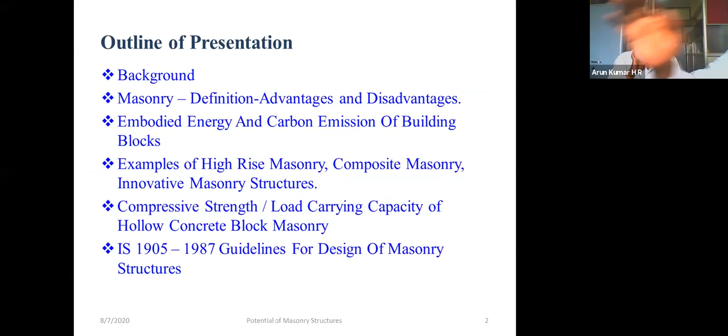Welcome to all the participants for this one-day webinar. Because of the pandemic situation, we have had this opportunity to have online seminars or webinars in order to keep our academic knowledge going. On that thought, today we would be discussing the potential of masonry structures.

When we talk about potential, in this presentation we would look at both aspects: one is the structural potential as well as the architectural potential of masonry structures. The presentation outline would go something like this.

We would look into the background of understanding the fundamentals of masonry, wherein we would like to define what is masonry, what are the advantages and disadvantages of masonry, and talking about masonry, one has to also look upon it as an eco-friendly material. So we will also see what are the embodied energy and the CO2 emission, which is emitted using some of the building blocks we have, which can be used for masonry.

And of course, talking about the potential, we would also see some of the examples we have in high-rise masonry, or maybe some examples for composite masonry, and some of the innovative structures which are of great importance.

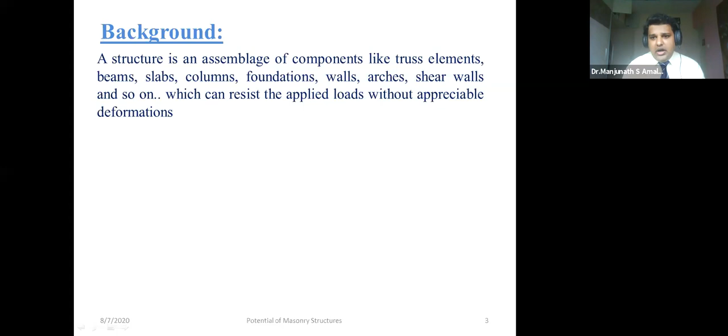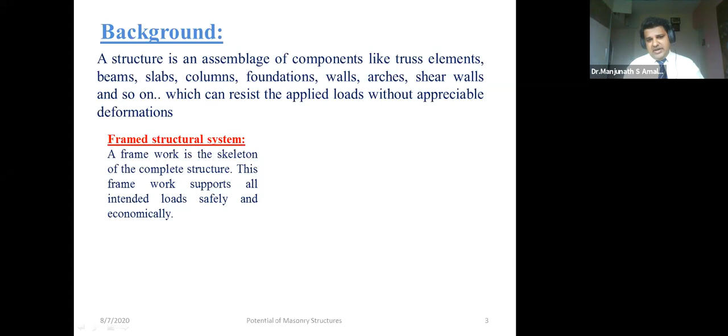We have come across various forms of structures. One which everybody is familiar with is the framed structure, also called the skeletal structure, where the structural members like beams, columns, and slabs are the ones supposed to carry the load, while the wall just plays the role of a partition or an infill. This is a typical RC framed structure, which I'm sure each one of us has seen.

The other option is a load bearing structure, sometimes also referred to as a continuous system. Here the loads from the slabs are directly transferred onto the walls, or through an in-plane or through the membrane action to the boundaries. Typically such a load bearing structure would be a masonry building, where the loads from the slabs are directly resting on the walls, and the walls are the ones supposed to be carrying the loads.

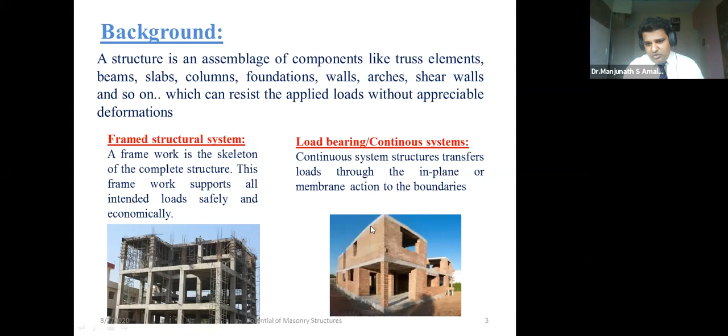Having looked at the forms of structures, let us go understand the term masonry. I'm sure all of us have heard this word masonry. We usually commonly call it walls. As per the codal recommendation, walls are defined as an upright structural member whose dimensions along the width are more than 4 times their thickness.

If I'm looking at this as an element which I would want to call a wall, its width has to be at least 4 times more than the thickness. If this condition is satisfied, that is when we can call an element a wall. On the contrary, if it is less than 4 times, then we would have to design it as a column, a masonry column, or a pier.

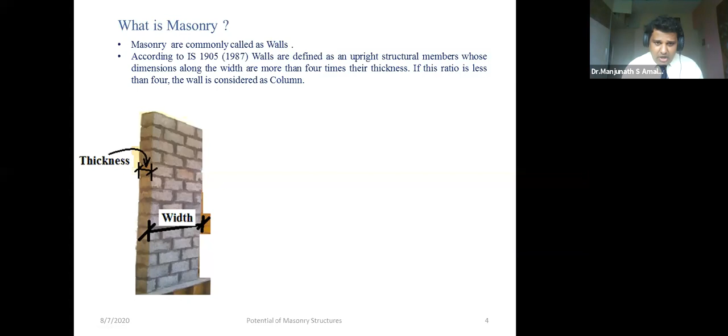Based on the structural configurations and functions, walls or masonry can be categorized as load-bearing walls and non-load-bearing walls. What are load-bearing walls? As the name goes, these are the walls supposed to bear the loads. The loads from the slabs are directly placed on the walls, and the walls have to take all the load onto themselves. Subsequently, the walls are constructed one above the other, and they are the members resisting all the loads.

The other option, as I mentioned, is a non-load-bearing wall. As the name goes, it is one which is used just to fill the frame and is not expected to carry any load. All the loads are carried by the structural members, that is the beams, then to the columns, and then to the foundation. The walls are just filling in the frame.

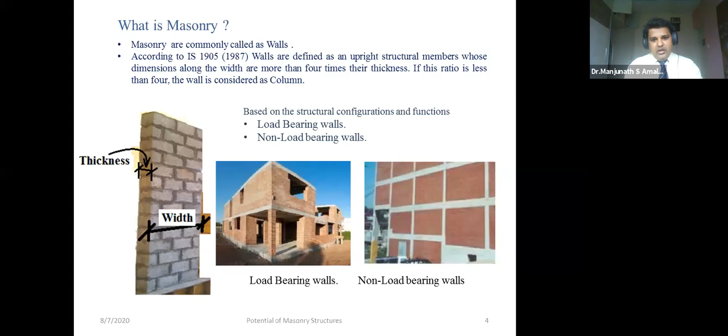Moving ahead, let us understand the advantages and disadvantages of masonry. The advantages: yes, because it's a prefabricated structure, there is no formwork required, and there is no curing unlike concrete structures. There is greater flexibility in terms of the plan forms. It has both a functional and a structural role to play, and you can say it is economical also, depending on what building unit is being used.

It is durable, because we have several examples of masonry structures built maybe hundreds of years ago, if not more, which are still standing to this date. From that we can say for sure that it is certainly durable, and also environmentally friendly, because there is less amount of energy consumed, and the carbon dioxide emission is also far less than its other counterparts.

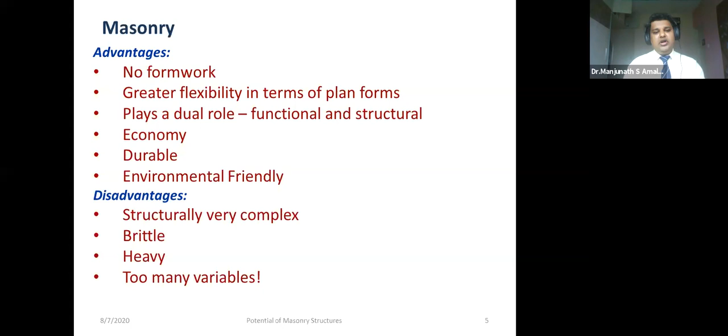Well, like any technology, masonry also has disadvantages. It is structurally very complex and brittle. If you have to construct a high-rise masonry structure, you end up getting a very heavy structure for sure. And there are too many other variables involved, making the design a little more complex. These are the disadvantages of masonry.

Let us try to compare the two materials: concrete, which is plain cement concrete, and masonry, in terms of their behavior, composition, and distribution of component materials. We all know that concrete and masonry agree upon being good in compression, both equally good in compression. In concrete, one can achieve a better mix design and better strength, but it goes with the application. So both are good in compression and both are equally weak in tension, and both are brittle materials. Whereas concrete is assumed to be a unimodulus material, masonry is a bimodulus material.

In terms of composition, concrete is made up of fine aggregates and coarse aggregates, with a binder - depending on the binder used, you can have cement concrete or other types of concrete. In masonry, we look at masonry units and mortar as the two key ingredients. Masonry units have various options, which we will see a little later. These masonry units have to be stitched together, and that is where the role of mortar comes in. We also have different mortars which one can use for constructing masonry.

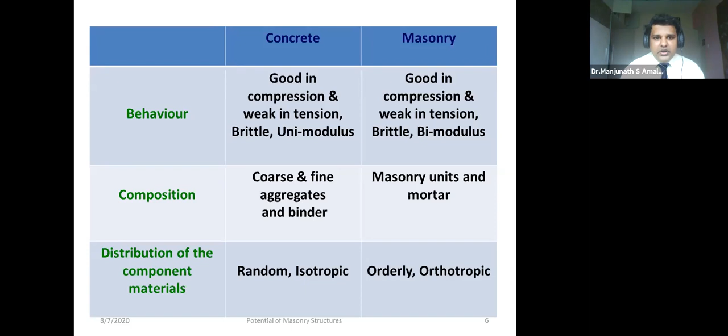Now, what are the options we have in masonry units? We have seen or heard of these options. We have adobe, which are basically rammed earth or sun-dried mud blocks. We have stone or laterite blocks. We very often use burnt clay bricks. Of course, concrete blocks, which can be solid as well as hollow. And you have calcium silicate blocks, stabilized mud blocks, gypsum blocks. There are a few more additions not included here.

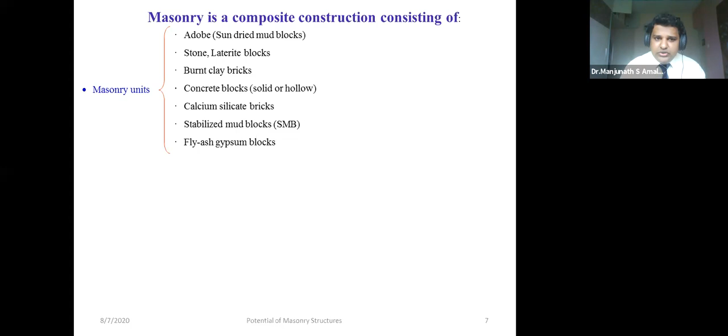What block or type of unit one has to use purely depends on the requirement. Geopolymer blocks are the new ones added to the list of masonry units. Talking about stitching the masonry, you have mortar which does the job for us. Traditionally we have been using mud mortar and lime sand mortar, and after the advent of cement, we started using cement or cement sand mortar, or sometimes composite mortars, which are a combination of cement, lime, and sand. Depending on the requirement, one can also go ahead with some additives.

When talking about reinforcement, yes, we do have structures built out of masonry, and it could also be reinforced. One option is the metallic one, which is traditionally used, also used as reinforcement in concrete structures. The same can be used in masonry structures. There have also been bamboo sheets or bamboo strips used as reinforcement, in order to make it a little better when it comes to any lateral loading.

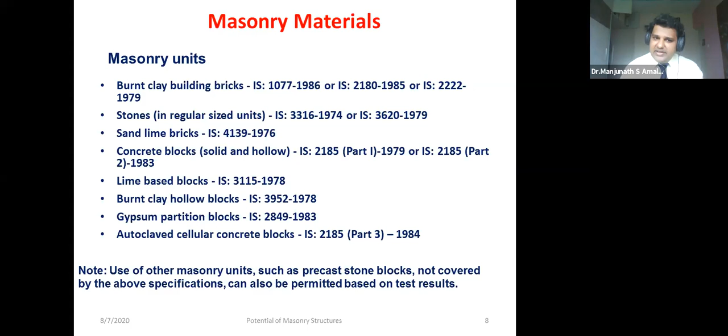I just brought up this slide here, which one has to refer to when it comes to any of the design of masonry or related aspects. This is just brought for that reason.

Now, talking about masonry as an energy efficient building material - this is a very important aspect which has to be understood.

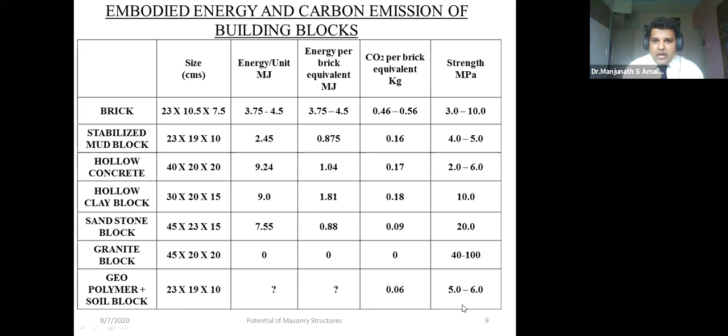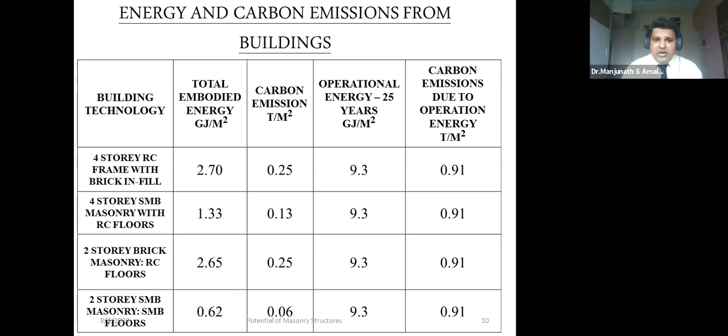Going ahead, talking about masonry units and the alternatives we have, this is one alternative which is being extensively used: hollow concrete blocks, rather the solid concrete blocks, which were being made using a very crude method earlier. But now there have been a lot of manufacturers who have kept a better quality control and are in a position to make good quality hollow concrete blocks.

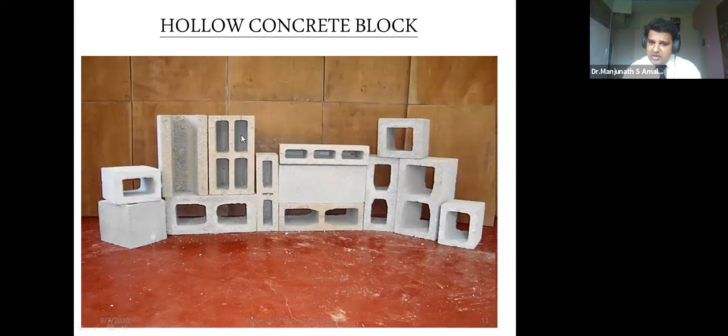Going ahead, with hollow concrete blocks, one could see two types in the market: one having smaller dia holes but more in number, and the ones I showed previously having two larger holes, with two different sizes. The ones with smaller dia of holes, smaller voids but more in number, we usually refer to as cellular concrete blocks. The ones with larger holes we refer to as hollow concrete blocks.

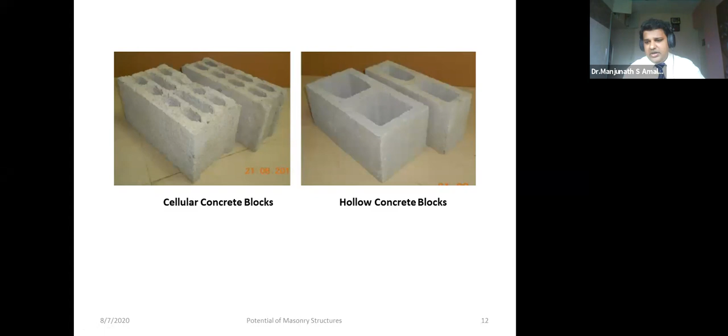This is actually the brainchild of Astra, Indian Institute of Science. This is the press called the Mardini press, which is used to produce stabilized mud blocks. It was under the guidance of Dr. K.S. Jagadish, who was the director for Astra, Indian Institute of Science, and who actually designed the machine.

The blocks are made by processing sandy soil with a certain percentage of stabilizer. One can use cement as the stabilizer, and then it has to be pressed at the optimum moisture content. So one can get blocks which would look something like this. Although I do not have the picture of the block, I have a picture of the masonry, or the wall, being built using these stabilized mud blocks.

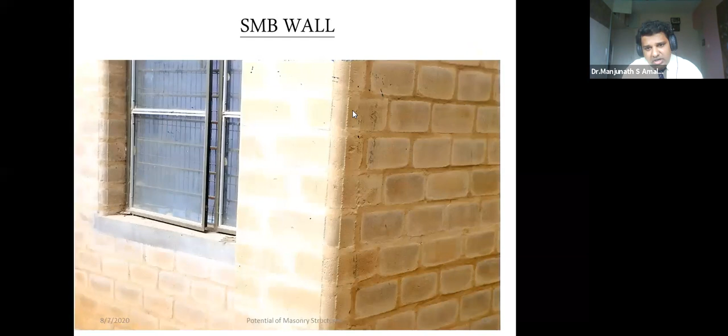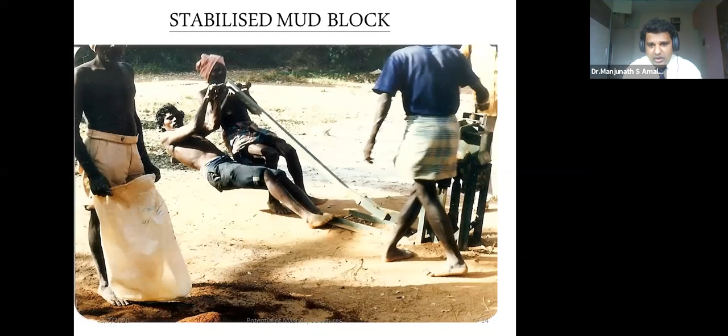You can also see that in order to have this rounded finish, one can do it using the same press mentioned earlier. Now, not only rectangular blocks, but one can produce blocks of various shapes and sizes for various purposes. If you want to have it as a cornice, one can produce blocks depending on various applications, of various shapes and sizes.

You see here the block which has a depression here. We will discuss these types of blocks a little later when we look into the applications of these blocks.

Let us look into some examples where high-rise masonry have been used. Now, let us first start with abroad.

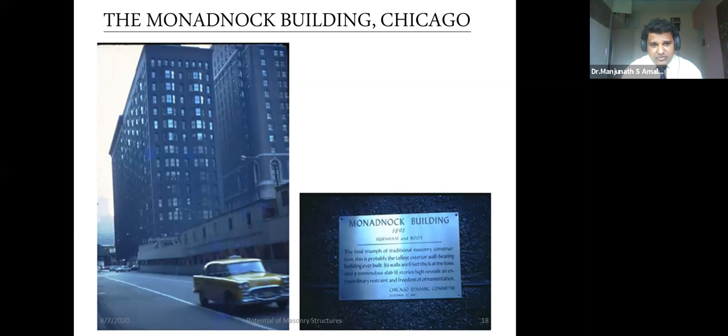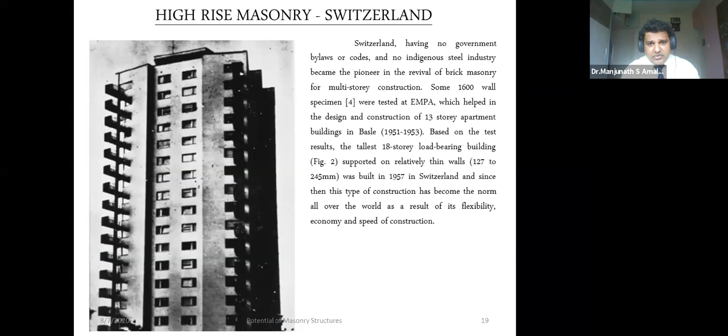Subsequently, we can see a lot of examples like this one, built in Switzerland. It's very interesting to note that during the 1950s, Switzerland and even Denmark did not have a steel industry of their own, yet had to build 13 to 18 story buildings using masonry blocks. What you see here is built in Switzerland. You can see some more in Europe - the one on your left is built in UK, and one in Denmark.

Well, the wall thickness is considerably low because of the achievement in strength, or due to better blocks manufactured, one could significantly reduce the thickness of the walls. The one you see here is built in the 1960s, with thickness ranging between 210 to 355 mm.

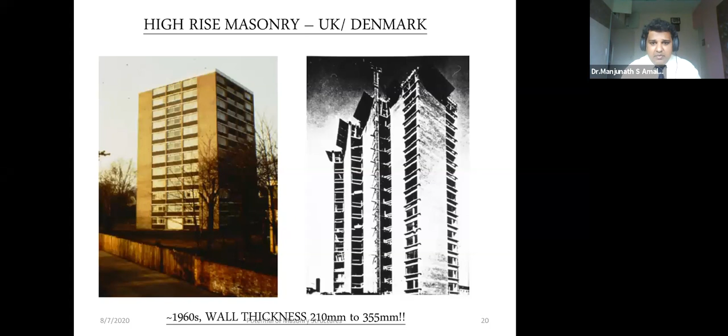On the Indian context, yes, there have been buildings built using hollow concrete blocks, like the one you see here. This is a 9-story building being built in Nashik, which is a hotel building. The one on the left is a 6-story high-rise building built in Mumbai by the architect Mr. Ganesh Kamath. And on a very local front, this is a building close to Bengaluru in Mysore, where a 2-story hollow concrete block masonry building has been built.

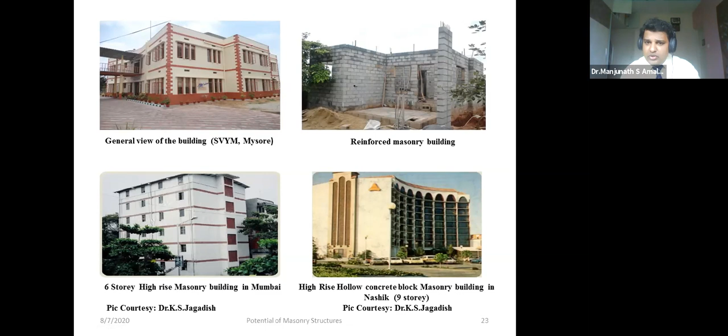This is a residential building built in Bangalore. You can notice that because of the advantage of having larger holes in masonry, particularly hollow concrete block masonry, if you want to make it good in lateral loading also, one can go ahead and reinforce the masonry vertically. Depending on the design, you can place nominal reinforcement as per the requirement, and go ahead with reinforced masonry, which will not only be good in vertical loading but also reasonably withstand lateral loading as well.

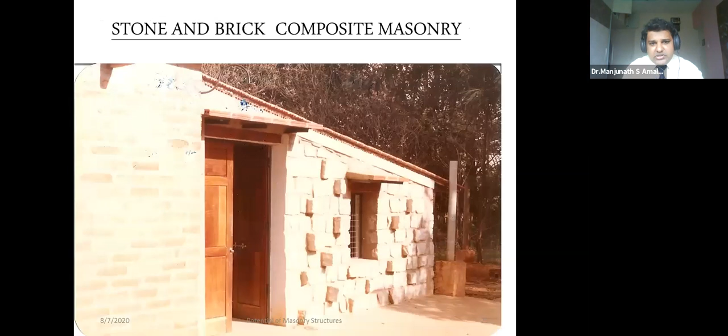Now, one thing we know about concrete is it's not that good in tension, although it's very good in compression. If that is the behavior of concrete, then one can afford to remove the concrete in the tension zone of the slab and replace it with another masonry unit. Let's say in this case we have a stabilized block, which I mentioned in the beginning. This part of the concrete is replaced with blocks.

And of course, there would obviously be tension at the bottom, so we leave the tension to be taken by the reinforcement, which can be placed or designed to be placed in between the two rows or columns of these blocks.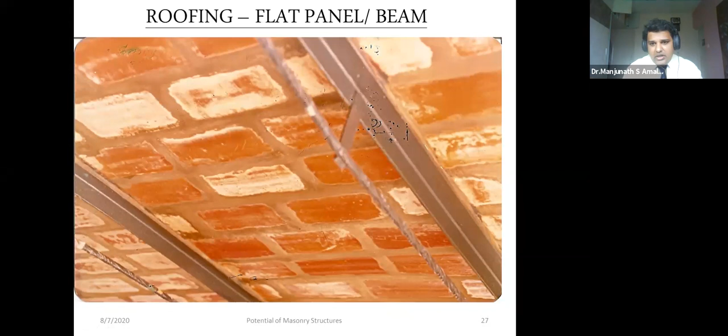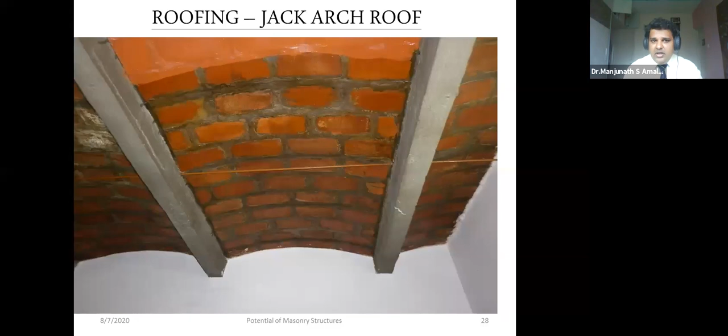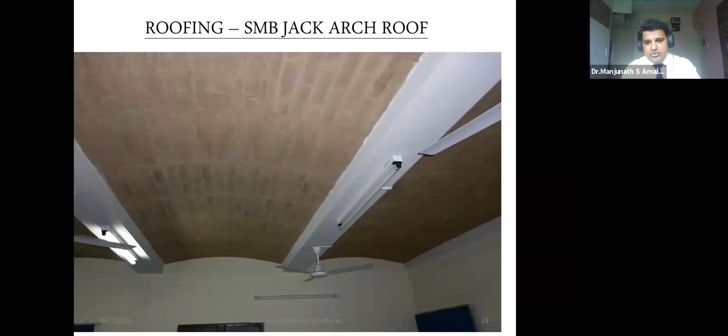If one wants to use an arch kind of roofing, you have the option of making the panels again, and one can also have a jack arch roof. This is done using masonry, and here are some more examples where stabilized mud blocks have been used for jack arch roofing. This is a beamless jack arch roof slab.

Moving forward, talking about some more examples with SMB - this is another building in Karnataka where a 4-story stabilized mud block masonry has been built.

You can see that it is architecturally pleasing. The plastering is avoided, making it that much more efficient because of less usage, and it could be worked out to be more economical as well. The good part is that it consumes far lesser energy and lesser CO2 emission, as discussed in the beginning slides.

Some more examples. This is a school building in Tamil Nadu where stabilized mud blocks have been used, and this is a vault built using the stabilized mud block. If one wants to look at the construction, it's quite simple: you have a movable template which is traversed from one part of the roof, and you just have to place your blocks over the template with proper locking, and then the vault would be finished.

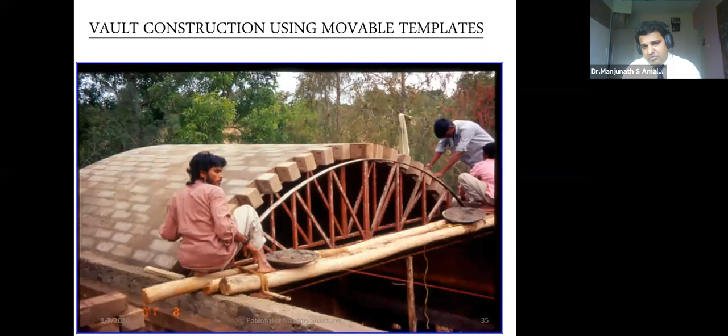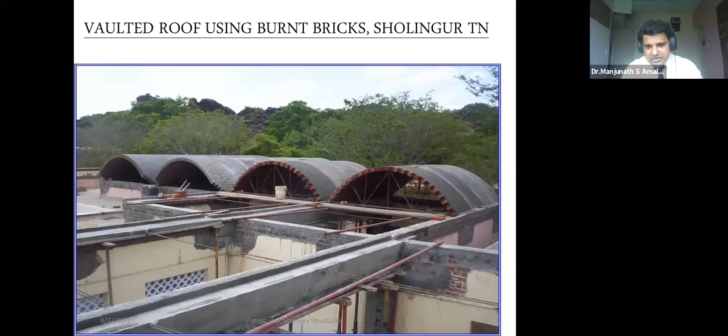This is another example of a building in Sholingur, Tamil Nadu, where a vaulted roof has been built using burnt bricks. The masonry is not restricted to vertical members like walls or horizontal members like filler slabs. You can build curved roofs as well. One classical example you can think of is a dome.

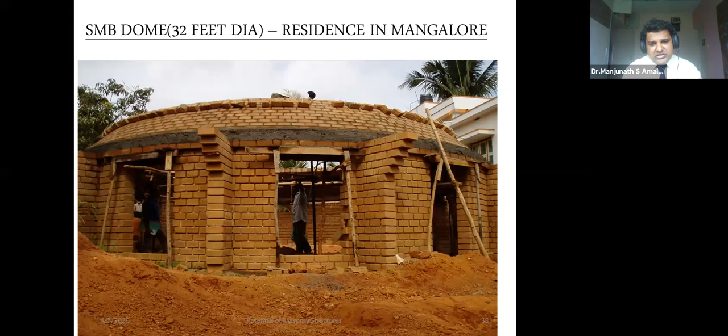As we mentioned in the beginning, even for the construction of a dome, unlike RC structures, we do not require formwork. The technology is very simple: you just have a single rod which serves the purpose of a guide. This rod is pivoted at the center of the dome, and using this rod as the guide, all you have to do is keep on placing the blocks and go ahead with whatever profile you require.

The rod can be lowered or heightened based on the rise of the dome which one wishes to have. If you want a shallow dome, you just have to lower the center point of the dome.

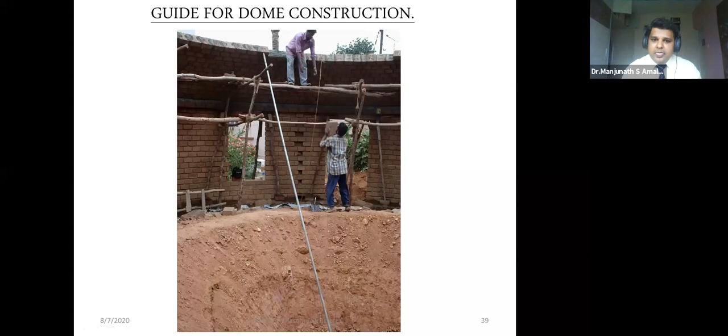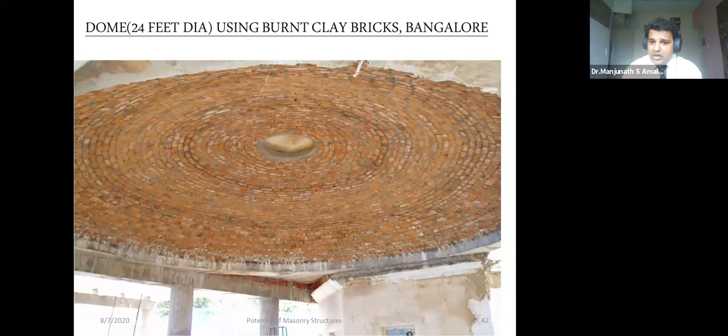Now, if I want a curved roof but don't have a square plan—let's say I have a rectangular plan instead—and I still want to construct a dome, for such cases one can choose a dome in ellipsoidal shape, or an elliptical dome. On that note, we had a project student who wanted to work on that at RV College of Engineering, Bangalore, where we attempted to construct a dome in the form of an ellipsoid.

The idea is quite simple. It's basically a prolate spheroid, where if you look at the plan and a section along the major axis, it would look elliptical, while a section along the minor axis would be shaped semicircular. Based on the geometry, one can arrive at two points called the foci.

What we did was erect piers depending on the span—we took 4 meters as the major span and 3 meters as the minor axis span. The distance between the two piers was calculated, giving us these shapes as supporting members. Using the foci, these are the two piers at the foci points, and with a constant thread, one end connected to one foci point and the other end connected to the other foci point, we just pulled it out.

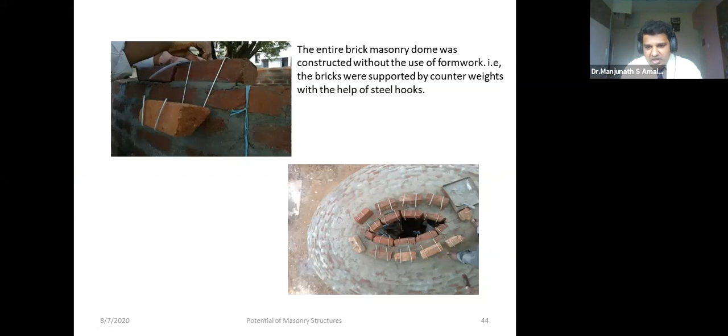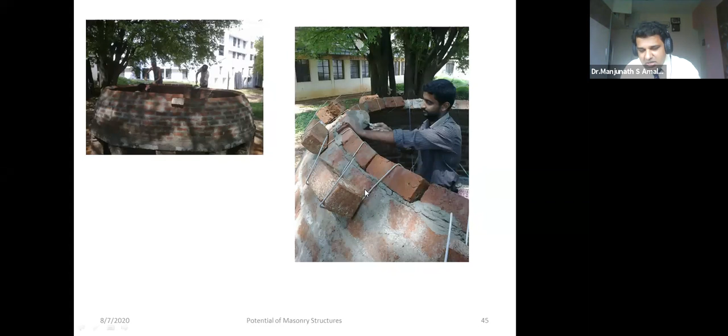A number of layers he went about doing, and these are the various stages of his construction. He's the student who has done this, and the counterweights here, you can see, are trying to counteract the weight of the blocks which are just placed in position.

The product, one could imagine, this is the interior of the dome, and this is the final product we had. As I said, along the major axis it is elliptical in shape, while taking a section along the minor axis it would be a shape of a semicircle.

If you don't want a dome of such a big rise, one can make shallow domes by just lowering the position of the foci. So if you play around with the position of the foci, and come back with the distance of the foci, one can construct domes of shallow depth as well.

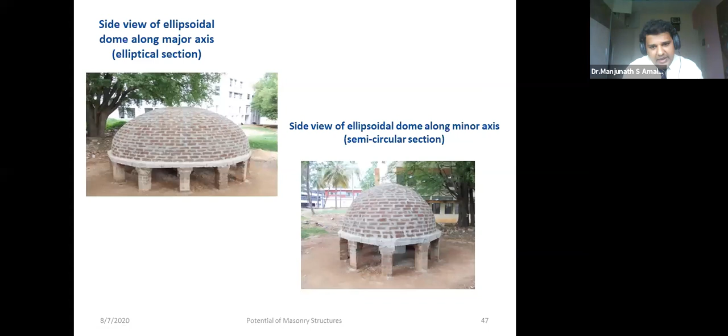Talking about innovation, it is not complete unless we talk about the famous architects behind constructing some of these famous structures. One cannot forget architect Dieste, who was an Uruguayan architect. During his tenure, sometime in the mid 20th century, he came up with wonderful, very innovative structures.

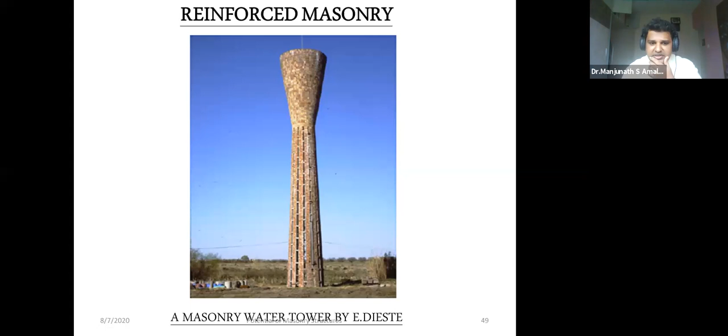The one you see here is actually a masonry water tank, of course reinforced. We have seen reinforced concrete structures and their potential, but masonry is also not far behind. With proper design and proper placement of reinforcement, one can achieve wonderful structures like this masonry water tank, built in the mid 20th century.

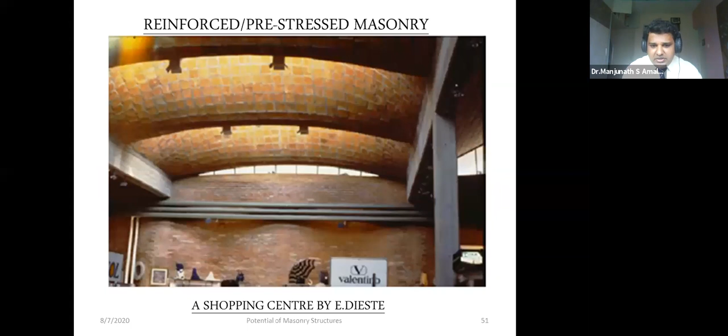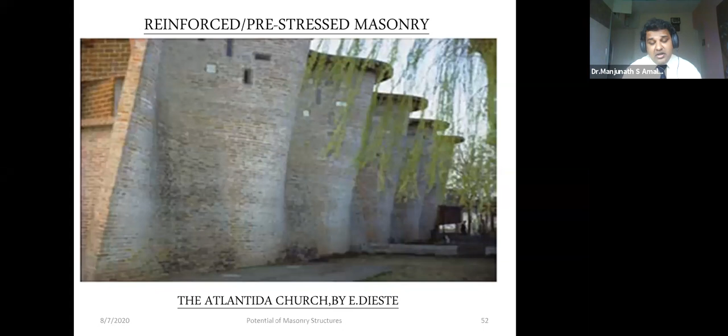These are some more examples of the same designer. This is a shopping center in Uruguay, and this is a church, again in Uruguay. If you just search the name of this designer, you can see a lot of examples of great interest for a structural engineer, and one can appreciate such structures being constructed with masonry.

How can one also forget Antoni Gaudi? Some of the structures constructed maybe a century ago, or late 19th century, are such fascinating structures designed by this famous architect. He was a Spanish architect during that period.

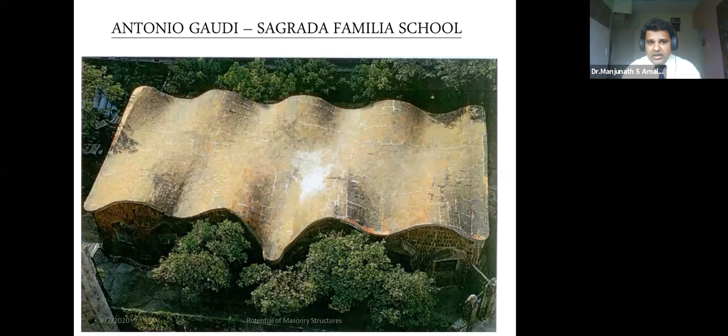This is what you have, a school building. It's not restricted to being only used vertically or horizontally, you can construct corbels and arches using masonry.

All these pictures talk by themselves about the potential of masonry structures. And remember, these were built maybe more than a century old, maybe 150 years old.

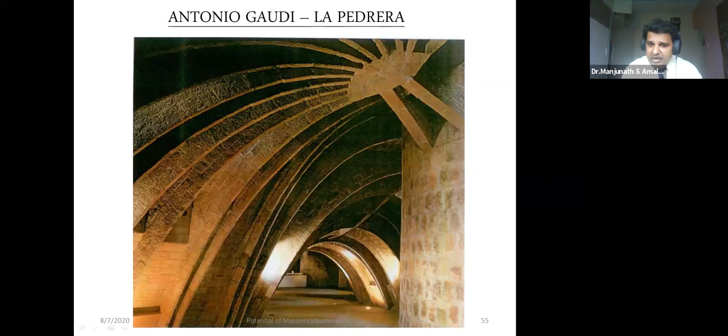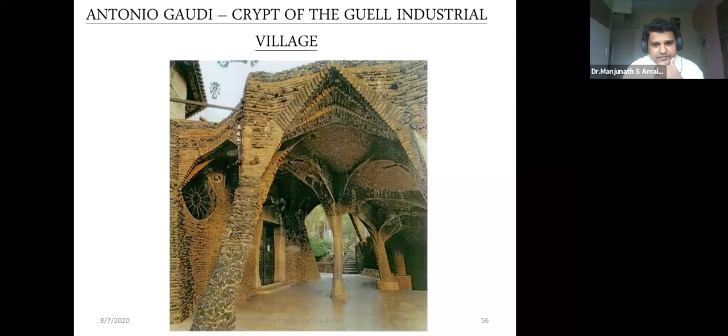This place is about 23 kilometers south of Barcelona. Well, these are some of the structures. I'm sure if you just search, there are likewise many such architects or designers who have very innovative structures which have been built using the concepts of masonry structure. From these points, I think we could appreciate, or we could see, what is the potential of masonry structures, in terms of structural as well as architectural aspects.

Now I would like to extend my presentation in order to look at how do we go about assessing this masonry strength. What are the ways in which I can find out the strength? And adding to that, I will try, maybe in a nutshell, to also explain very briefly what are the guidelines as per IS 1905 and how do we go about the design of a masonry structure.

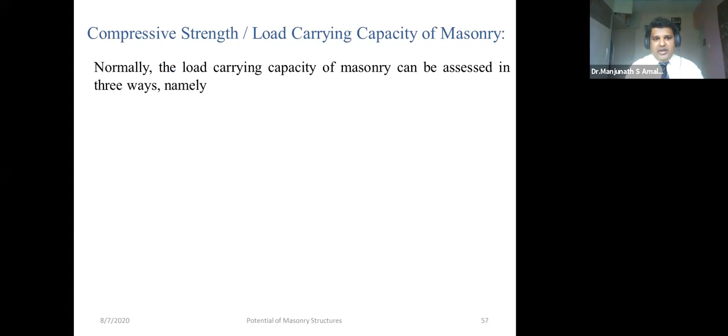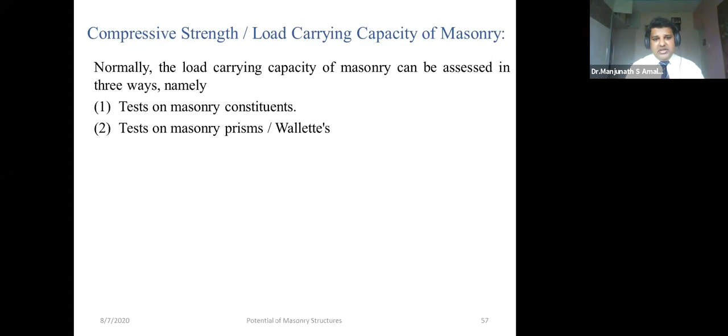Now, if I have to assess the load carrying capacity of masonry structures, there are three possible ways. First, it would be to test the masonry constituents. When I say masonry constituents, it would be testing the masonry units, and of course the one which is binding them, that is the mortar. Secondly, one could test the masonry prisms or wallettes. What are prisms and wallettes? We will discuss a little later. And the third option, which is the most preferred one, if one can afford it, if one has the facility, the best way to test a masonry capacity is to do a full-scale wall specimen.

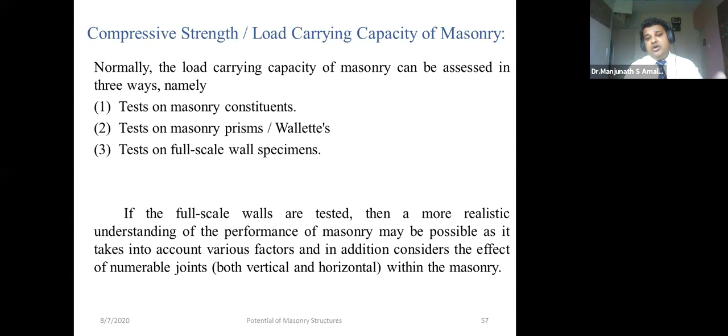Now, when I say full-scale wall specimen, what I mean is a story height wall which can be tested. Story height, let us say, if I'm looking at a conventional residential building, I would look at a height of, let us say, 3 meters. If I can have the facility to test full-scale walls, that would be the best option, because it will give a more realistic understanding of the performance of masonry. It takes a lot of factors into consideration, and very importantly, it takes the effect of joints, because in any structure, especially masonry structures, it is the joints and the number of joints which decide the load carrying capacity.

Now, how do we go about it? Let us go one by one. If you have to test the masonry constituents, I'll have to test the masonry units. What are the tests one has to do? The physical tests, and of course the structural properties. What are the tests one can do for physical properties? One has to know what is the water absorption of the block, what is the density of the block, what is the initial rate of absorption. And structurally, one has to know what is the strength of the block, apart from looking at the characteristics of the masonry units.

Secondly, we'll also have to test the mortar characteristics, since this is the one which binds the block units. Again, compressive strength, flowability, stress-strain characteristics — these are some of the tests which one has to perform when we talk about the mortar.

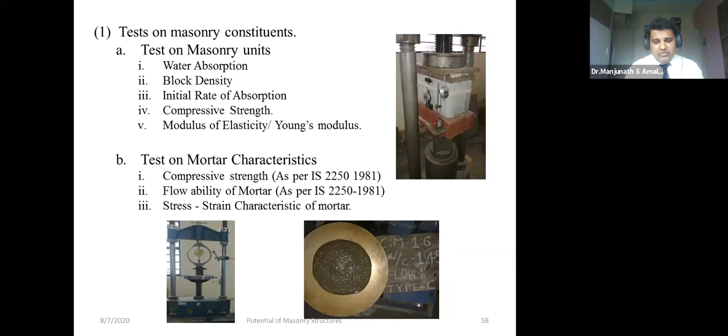The second option, of course, is to test the prisms. What are prisms? To understand, prisms are basically short walls, of certain h by t ratio, where the h by t does not exceed, let us say, 6. These are elements which have been constructed keeping the blocks one over the other, like a stack bonded prism, with of course the joints. And then if you also want to take the vertical joint into account, you can have it as an English bonded prism.

The objective is to test for basic properties: compressive strength, modulus, and the stress-strain characteristic of the blocks. Although this could be the general kind of test for any unit, I would like to show the test results of some work which we did at RV College of Engineering.

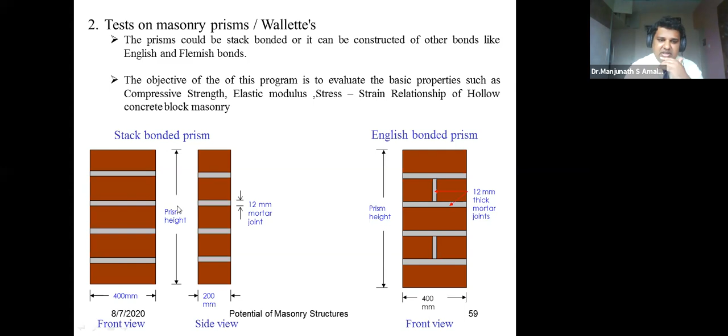This is how typically a prism would look like. As I mentioned, the prism is restricted - if you have to call it a prism, you can go up to h by t slenderness ratio of about 6. Typically you can have it as a 3 block or a 5 block prism, and we were fortunate to have this kind of facility at RV College of Engineering.

We call this the test floor. This is a facility which can be used for testing any structural element, be it a slab, column, or anything. The capacity was something like 2,000 kilonewtons, 200 tons. We could use this facility to test the prisms for compressive strength and other properties.

We were fortunate to have a funded project from VTU where we could erect a closed frame exclusively for testing tall walls. This is a wall which we tested, which is 3 meters in height. It requires a certain amount of arrangement which has to be done.

In order to look at the boundary conditions, it's assumed to be laterally and rotationally restrained at the bottom. In order to have it only laterally restrained at the top, we have an arrangement with a spring and a roller, which makes sure there is lateral restraint but no rotational restraint at the top. To ensure the loading is uniform, we used a staircase system of loading where the load through a closed frame was transferred to two different tiers of loading, transferring the load onto the masonry unit as a uniformly distributed load.

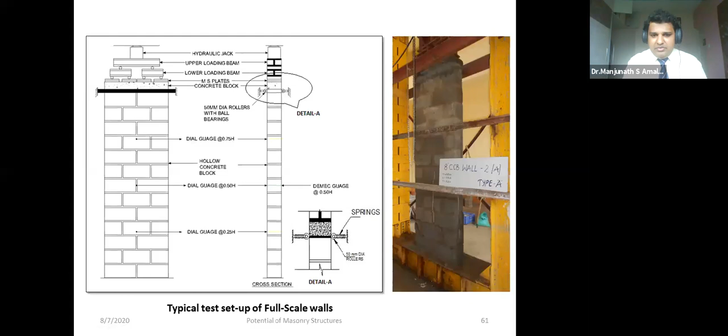Because of want of time, I'm afraid I would not be able to share the results of this, but certainly about the prisms we would definitely look into some of the values.

These are some of the factors I did mention. If you are trying to test full-scale walls, the masonry units and mortar strength characteristics are the primary factors for sure. Apart from that, the slenderness and the eccentricity of loading play a very important role.

If I just place these units one above the other, increasing its slenderness, in other words increasing the h by t ratio, and again I'm trying to apply a concentric load, as the height increases it's a general phenomenon that one would expect a reduced strength.

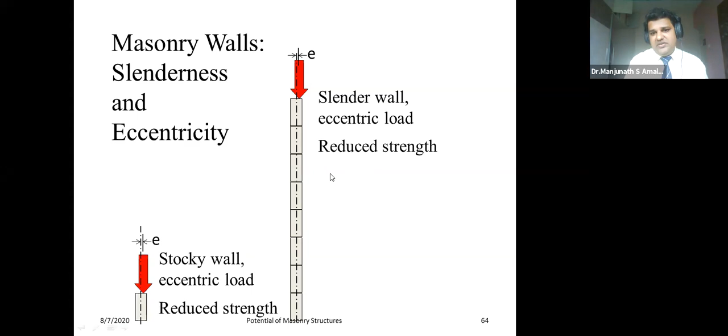Similarly, what does eccentricity mean? The loads are not acting at its CG - it is being placed at a certain distance away, which can be expected in any structure. If the loads are not concentric but eccentric, there is a reduction in strength. And if the same eccentric load is applied along with a taller wall, there is a further reduction in the strength or capacity of the wall.

This sums up these two points: that the slenderness ratio as well as the eccentricity of loading, and of course the boundary conditions, affect the strength. Apart from that, very important in masonry is the effect of workmanship. If the workmanship is not proper, one can expect the strength to be hampered, or there would be an influence on the strength of the masonry.

Just to repeat the fact, if I have a concrete block with smaller diameter holes but more in number, I would call it a cellular block. Well, if I have larger holes, then that is your conventional hollow concrete block.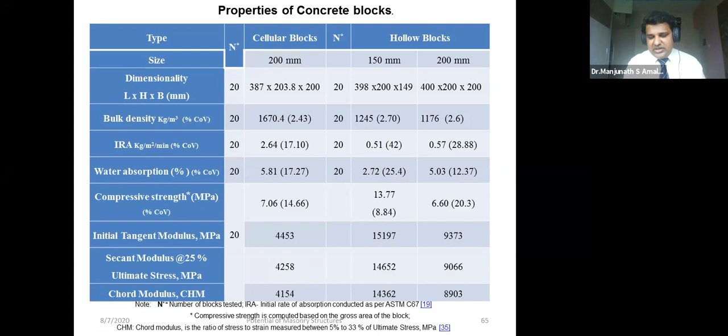The first rows talk about its physical properties: dimension, density, initial rate of absorption, and absorption itself. More importantly, the structural properties show around 7.06 MPa for a cellular block, looking at two different sizes, 150 and 200 mm blocks, giving 13.77 and 6.6 MPa as strengths respectively. One would also want to know its elastic properties, so we test for tangent Young's modulus as well.

Now, going forward, what is the code? It is Indian Standards 1905. This is the code one has to look for to design a masonry, unreinforced masonry structure. It was first published in 1960, revised 3 times, and reaffirmed in 2002. Like a separate handbook for RC code, we have a separate handbook for masonry structures in SP 20. This code provides recommendations for load bearing and non-load bearing walls for unreinforced masonry structures, and for static loads only.

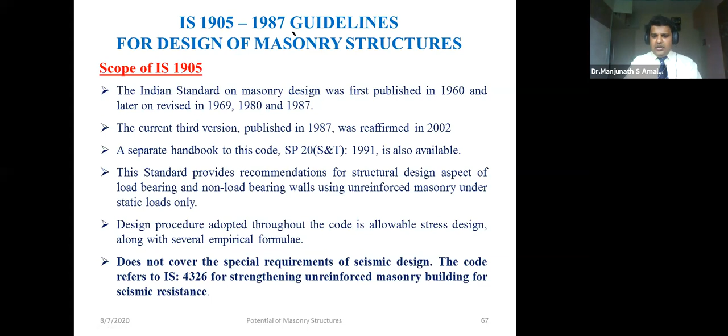The philosophy of design as per the code is simple: the allowable stress method, or working stress method. If you want to design for seismic loading, there is a reference to IS 4326, for strengthening unreinforced masonry for seismic resistance. Now, the fundamental principle behind the working allowable stress method is that you have to find out the actual stress.

Now, what are actual stresses? Stress by definition is load over area. So if I have to find the actual stress, I would want to know the load coming onto the wall, and dividing it by the area gives me the actual stress. This actual stress has to be compared with something called permissible stress. Now, how do I find the permissible stress is the next question.

Now, before we go to the permissible stress, the loading - dead load, live load - is as per RC structures, since I'm looking at an RC slab here, so you refer IS 875 for its various categories of loads. Also, before permissible stress, one has to understand that if I'm looking at load dispersion for a wall, I would look at a dispersion angle of not more than 30 degrees.

Where do we come across this? I will talk about it a little later, but for now I'd like to mention you would come up with dispersion angles whenever you have an opening in a wall. Let us say you have a window or a door, then one has to look upon what would be the angle of dispersion of vertical loads on walls when such a scenario occurs.

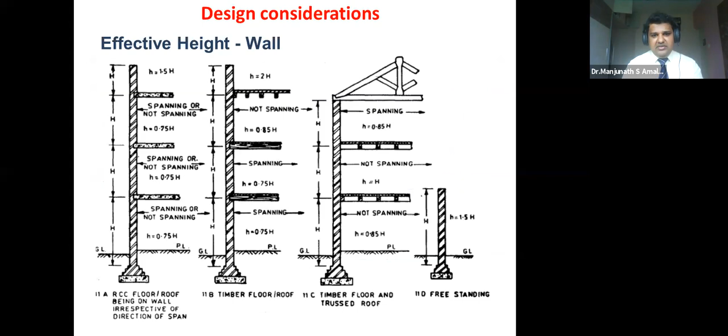Coming back to permissible stresses, since this is what we compare with our actual stresses, the code says it can be calculated using certain parameters. The first is the basic compressive stress, which we will talk about. This basic compressive stress has to be multiplied with certain reduction factors: the stress reduction factor, depending on slenderness, the area reduction factor, based on the shape of the block, and the shape modification factor, which also depends on the shape of the block. Now we'll go into each one briefly.

Let's look at basic compressive stress. There is a chart or table given in the code for basic compressive stress, applicable to blocks where the height to width ratio, when laid, does not exceed 0.75. This table can only be used if your block meets that condition. If so, knowing the mortar type and the block strength, one can arrive at the basic compressive stress. This is one option to find it.

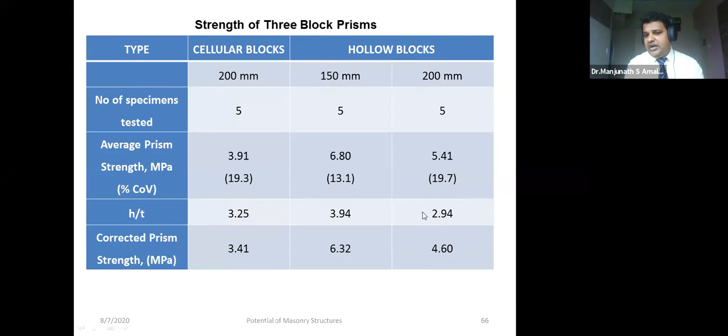In that note, going back again, 2.94 is my h by t. How did I get 2.94? Because it was a 3-block prism, one above the other. So if it's a 200 mm block, 203 times with 2 mortar joints gives a certain value of h. Dividing by 200 mm thickness gives this value of 2.94. All I have to do is go back to that table and look at the value for 2.94. It permits interpolation, so I can find the correction factor and use it as applicable.

Now we've finished the first part, finding the basic compressive stress. What about the factors? As again, there are tables mentioned in the code. As I said, KS is the stress reduction factor. What does it depend on? It depends on the slenderness ratio and eccentricity. For slenderness ratio, I just take the height of the wall divided by the thickness.

I would get the slenderness ratio. Let us say if I'm not looking at any eccentricity, only concentric, let us take eccentricity as 0 or as applicable. Then one can get what is the slenderness, what is the stress reduction factor from this particular table 9, and then the area reduction factor.

This particular factor takes into account the smallness of the section of the block, and it's applicable where the area of the section is less than 0.2 meters square, which can be calculated using this particular equation. All you have to do is find out the area of the block, multiply by 1.5, then add 0.7, to arrive at Ka.

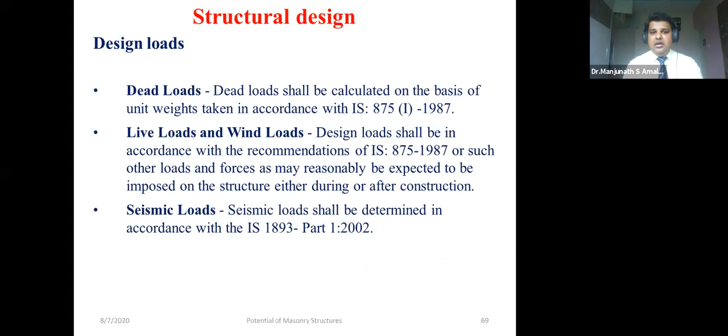Now we have this fundamental equation. We know how to find out sigma actual. We know how to find out sigma permissible.

Sir, do we still have time?

Hello? Yes, sir, yes sir. I'll take a maximum 10 minutes more. Yes, sir, continue.

So what is the calculation involved? Well, the design is like any conventional one, because as I mentioned earlier, we are looking at a conventional RC slab, which has to be supported by our masonry. Let us assume a slab thickness of 0.125 meter, the thickness of the wall as 0.2. The density of RC, as we know, is 25, and then the density of masonry.

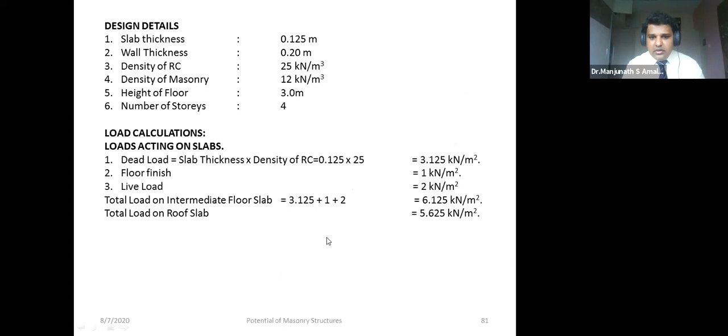Having known the area, we have previously calculated the load. Now multiply the area in meter square per meter into the load, which is in kilonewton per meter square. Meter square gets cancelled, so I have the floor load as 5.39 kilonewton per meter, and from the roof I have it as 4.95 kilonewton per meter.

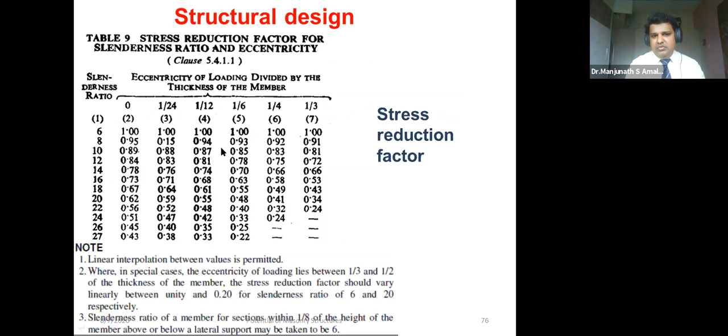All I have to do now is go to this table and find, for a value of 11.72, I have the choice of interpolation, and can take it as 0 eccentricity, or usually when it is an exterior wall, they prefer it to be taken as 1/6th eccentricity. So based on that case, one can arrive at the value of this slenderness ratio.

Ks is 0.847. I told you it is 0.7 plus 1.5 times the area. You know what is the area of the block? You multiply by 1.5 times and add another factor of 0.7, you will get the area reduction factor, which is here, my friends. And then finally the shape modification factor.

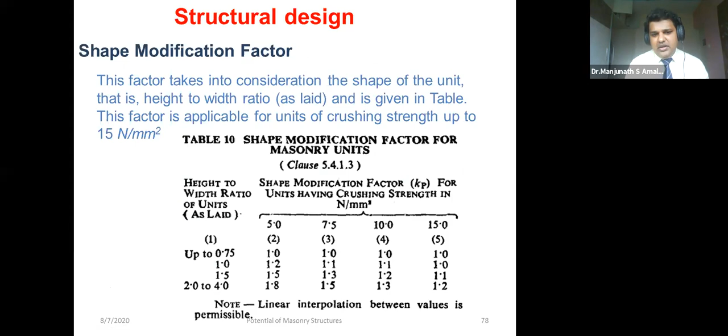Now this one is based on what is the strength. Where do I get the strength? I will again go back to my experimental data and check what is the strength of the block which I had got, and then looking at what is the h by t ratio for the unit, I can arrive at what would be the shape modification factor, which I've got here as 1.1, my friends.

Now it's time to get all of them together. As I told in the beginning, just a little while earlier, my friends, I have to multiply these factors with something called the basic compressive stress. Now, basic compressive stress, how do I get it?

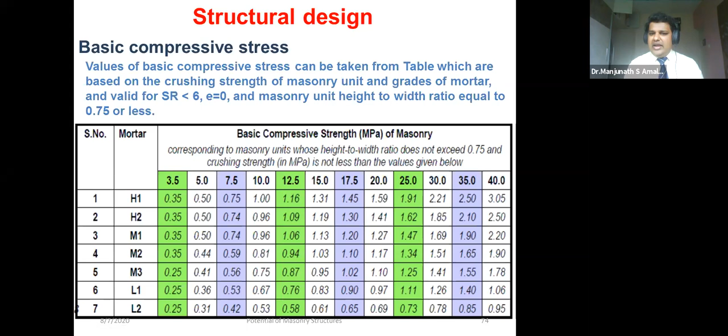I could have used this particular table, but this table is for units whose height to width ratio should not exceed 0.75. Now, unfortunately, our block is not having that, rather it's having a ratio of more than 0.75. So I cannot go with this table. This usually fits for brick masonry.

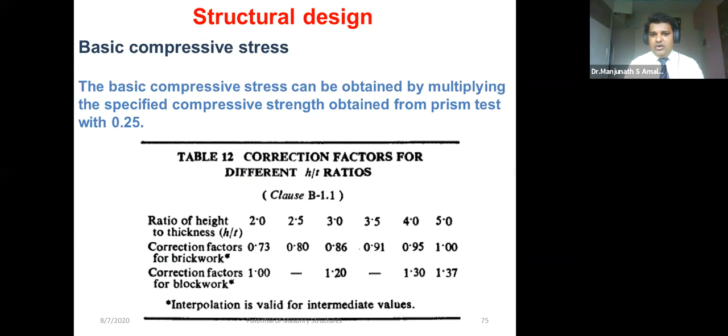I'll have to go with the second option which I have: find out the prism strength, divide it by 4 to get the required basic compressive strength. So that's precisely what we will do.

Go back here, look at what was my prism strength. If you recall, it was 4.6, my friends. 4.6 divided by 4 is 1.15. Now this 1.15 is just multiplied with all the other three factors, and you get a permissible stress of 1.01.

Now you can expect, because it's a solid wall, a larger permissible stress for sure, because there are no openings. So I just compare these two values: actual stress 0.26, permissible stress 1.01. The actual stress is less than the permissible stress, so therefore my wall is safe.

Well, I tried to keep this as simple as possible, and the wall which was chosen also was a solid wall. So therefore, my friends, we ended up having this wall to be extra safe, if I can say so.

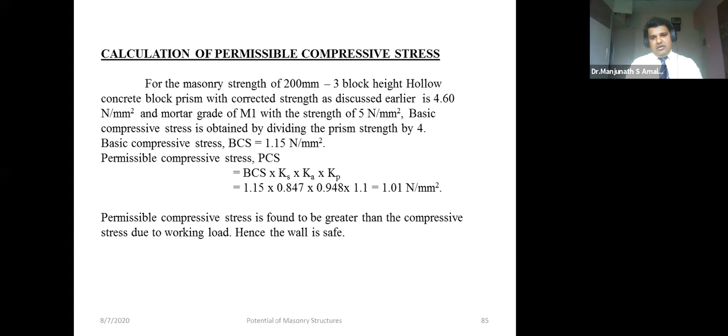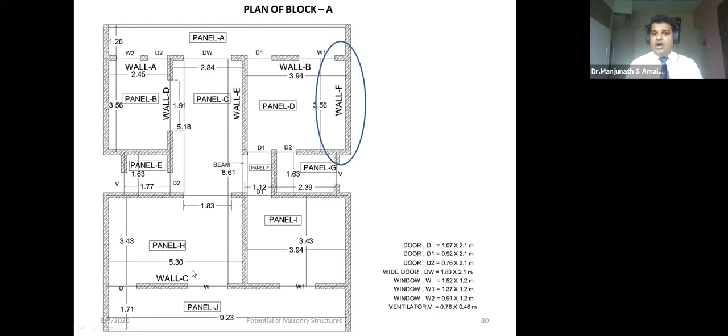Well, if you have other walls, let us say, if I go back to the plan, let us say I have a few walls here, wall D or wall C. You see, my friends, for such walls there are openings for doors and windows. If that is the situation, then you cannot take the entire length of the wall as the one resisting the load. It has to be calculated for another length, which depends on what I mentioned here with respect to the dispersion of vertical load and the angle.

So that's for another day, maybe. Because of lack of time, I think I would end my presentation with this wall, and this is how we go about with the design.

Well, at the end, I would fail in my duties if I did not acknowledge my academic mentor, Dr. K.S. Jagadish, who has been my academic mentor. I would always be thankful for all his inputs, guidance, and support throughout my academic career.

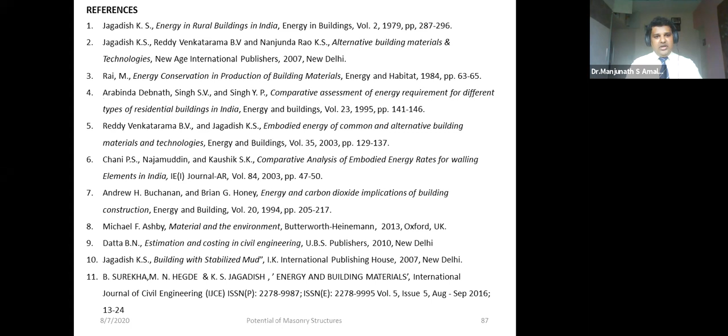And with this, these are the references. One can go about looking at most of the things with respect to energy. I've taken it from these references.